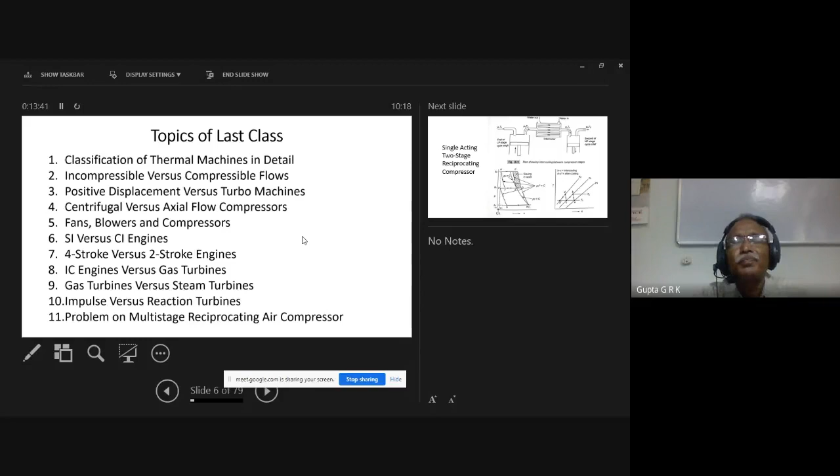And we have done a multi-stage compressor problem. This is a multi-staging one with a nice figure, so just recollect. Here, the bigger one is LPC, low pressure compressor. The smaller one is HPC, high pressure compressor. Air comes with suction conditions P1 and T1 into the cylinder.

So this suction goes from here to here, right? And here, both valves are closed and it gets compressed to B. At that point, if it goes further, the valve gets opened and it is pushed out of the cylinder - that is delivery. So B to G, there will be delivery.

After that, whatever is in the clearance volume gets expanded, and the cycle repeats. Its pressure is increased to intermediate pressure Px, and it is compressed to temperature Tx. Temperature goes up, and this increase in temperature reduces efficiency and increases the work needed, so I want to cool it using what is called an intercooler.

In the intercooler, it is constant pressure intercooling. So it comes from B to C like this. It is constant pressure intercooling. Here in the TS diagram, these are two pressure lines: this is P1 pressure, this is Px pressure, this is P2 pressure, all constant pressure lines.

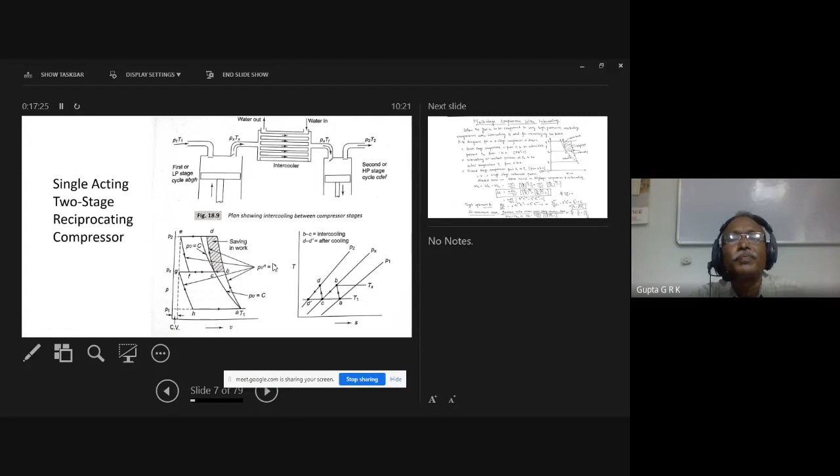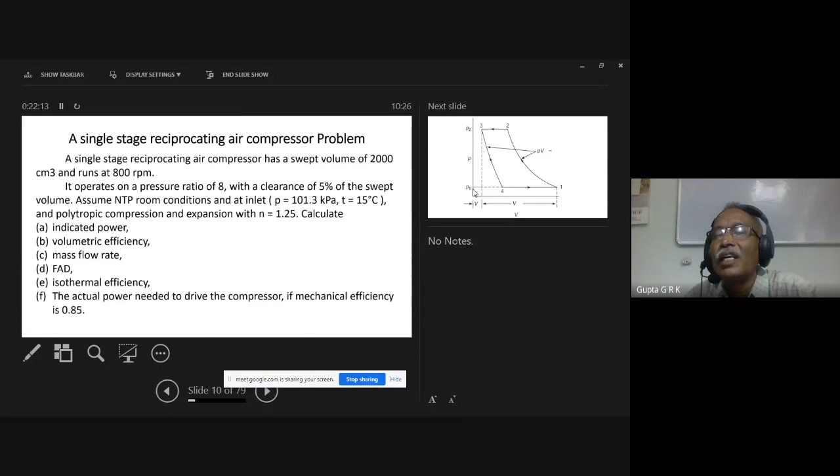The suction volume is V1 minus V4, from the suction which starts from 4 to 1. So the total cylinder volume is clearance volume plus stroke volume. You have to remember this terminology.

The stroke volume is given as 2000 centimeter cube. Clearance volume is given as 5% of the stroke volume, so 0.05 Vs, that is 100 centimeter cube. So the total cylinder volume is Vc plus Vs, which is 2100 centimeter cube.

Next, I want to find out what is the suction volume. For this I want to find out what is V4. This is because PV to the power n equals constant, so P3 by P4 and V3 by V4 are related. I can find P3 V3 to the power n equals P4 V4 to the power n, so V4 can be found as P3 by P4 to the power of 1 by n.

I know V3, which is clearance volume, and P3 by P4 is 8, and 1 by n is 1 by 1.25. I can find out what is V4. So the suction volume V1 minus V4 is 2100, the cylinder volume, minus 528, which gives 1572 centimeter cube.

Now we know that for a cylinder with clearance volume, the work is n by n minus 1, P1 into V1 minus V4 into P2 by P1 to the power of n minus 1 by n, minus 1. And n by n minus 1 is 0.25, 1.25 by 0.25, and T1, this is...

You have to put it in kilopascals, or he has put it in pascals. If it is put in pascals, I will get it in joules. If I put it in kilopascals, I will get kilojoules. So 101.3 into 10 cube, these are total pascals, into V1 minus V4, which is 1572 calculated here, in meter cube into 10 power minus 6.

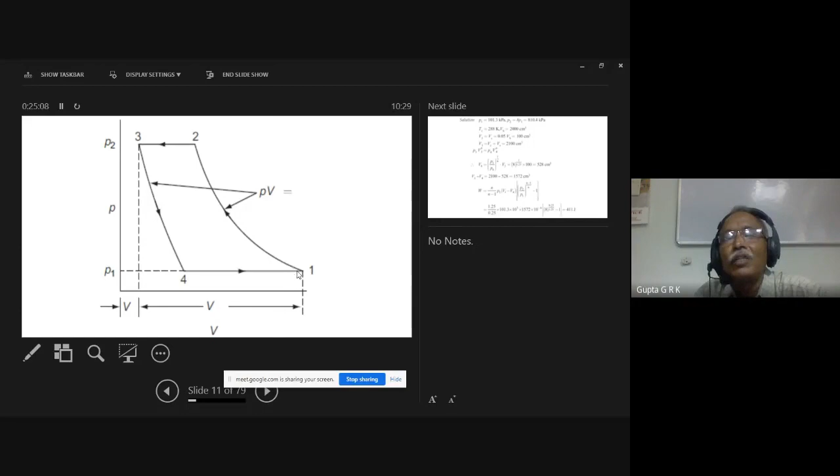And volumetric efficiency is V1 minus V4 by Vs, that is this volume by the stroke volume, because I have to get theoretically the stroke volume of air, but I am getting only the suction volume of air. So suction volume by stroke volume, that is 1572 by 2000 into 100.

This is volumetric efficiency. And mass of air compressed per cycle: so per cycle, this much volume is compressed. M is equal to PV by RT. P is anyhow this, and V is V1 minus V4, whatever air is compressed, and by 287 and 288, that is RT. So I will get this much mass flow of air.

This is per cycle, but again, 800 revolutions are there per minute, so into 800 gives 1.54 kgs per minute. And if you are asked per second, again divide by 60.

So it depends on how it is asked. This is mass compressed per cycle, this is per minute, and this is free air delivery. So V1 minus V4 is the free air delivered, which gives 1.26 meter cube per minute. This is mass and this is volume, right? So free air delivery is volume.

Now for isothermal efficiency, I have to find out isothermal power: P1 into V1 minus V4 log P2 by P1. We calculated P1 and V1 minus V4, and P2 by P1 log 8, giving 331 joules. This is for isothermal.

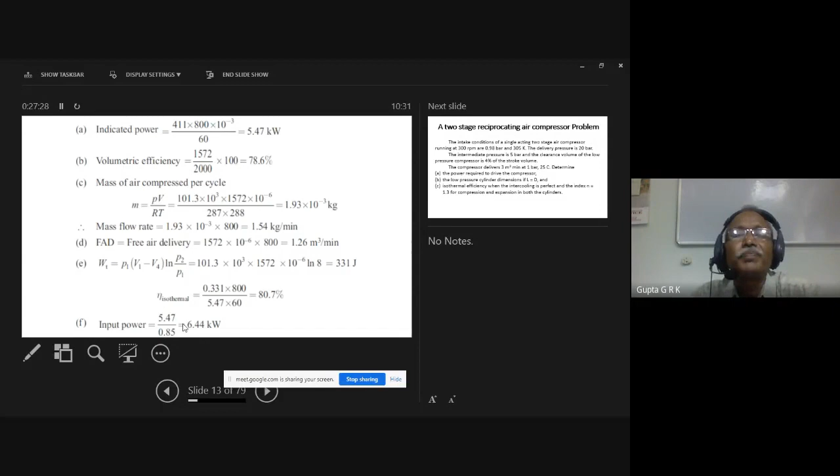This was a single stage; for two stage we already did one problem, but we will see one more problem here, where the intake conditions and NTP conditions are different.

The intake conditions of a single acting two-stage air compressor running at 300 RPM are 0.98 bar and 305 Kelvin - these are P1 and T1. The delivery pressure is 20 bar, and the intermediate pressure is given as 5 bar.

If the intermediate pressure is not given, I have to take the geometric mean of the two pressures, root of 20 into 0.98. But here he has designed for an intermediate pressure of 5 bar.

The clearance volume of the low pressure compressor, LPC, is 4% of the stroke volume. The compressor delivers 3 meter cube per minute at 1 bar and 25 degrees centigrade - this is the NTP condition he is taking. We need to determine the power required to drive the compressor, the low pressure cylinder dimensions, and the isothermal efficiency.

Okay, this is the indicator diagram, showing 0.98 bar, 5 bar, and 20 bar. So like the same thing here.

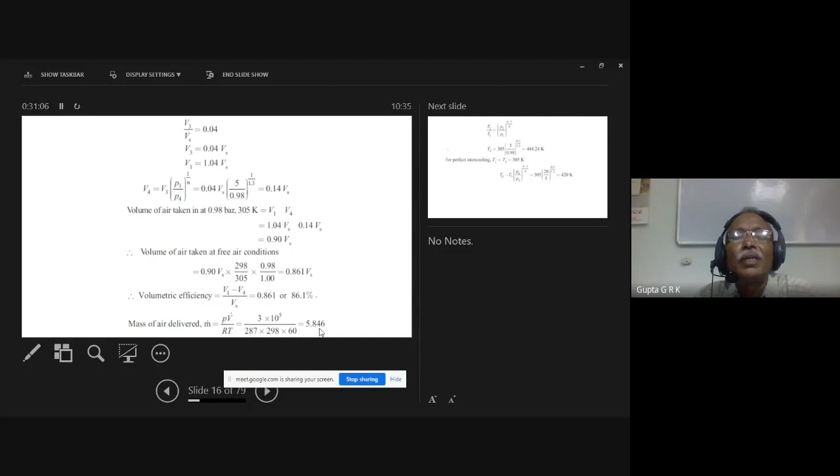The mass of air delivered is given as 3 meter cube per minute here, as the compressor delivers 3 meter cube per minute at 1 bar and 25 degrees centigrade, so that we put here. The pressure is only 1 bar, so 3 into 10 power 5 by RT, and taking it per second, we get the mass of air delivered in kg per second.

And if I want to find out what is the intercooling, also what is asked - we have to find out the low pressure cylinder dimensions.

T2 by T1 is equal to P2 by P1 to the power of n minus 1 by n. I can find out what is T2. And if I have perfect intercooling, T1 equal to T5, and T6 equal to, in the same way here, this is 6.

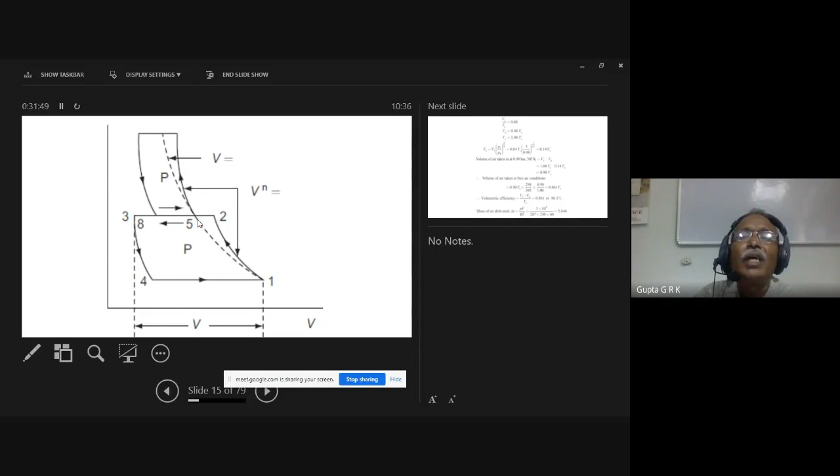So T2 by T1 I can find out from the P2 by P1 relation. And T6 by T5 I can find out by delivery pressure by intermediate pressure to the power of n minus 1 by n. So like that, I can find out what are the temperatures. T6 and T2 are found out.

And then the power required to drive the compressor, that is n by n minus 1, MR. Here, instead of writing in terms of pressure ratios, we are writing T2 minus T1 and T6 minus T5. We got in that way only, right? RT2 minus RT1, we have written P2V2 minus P1V1 and taken the common and all. So we can do this way, or you can use the pressure ratios, right?

So T2 minus T1 and T6 minus T5, I can find out what is the amount of power required. And mass of air delivered per stroke. This is because RPM is given 300 RPM and per second per stroke by 60, I can get this. And volume of free air per stroke.

Again, this PV by RT you can use, and you can find out what is the meter cube. And stroke volume pi by 4 d square L, if L and D are the length and diameter of the cylinder. So this is equated to

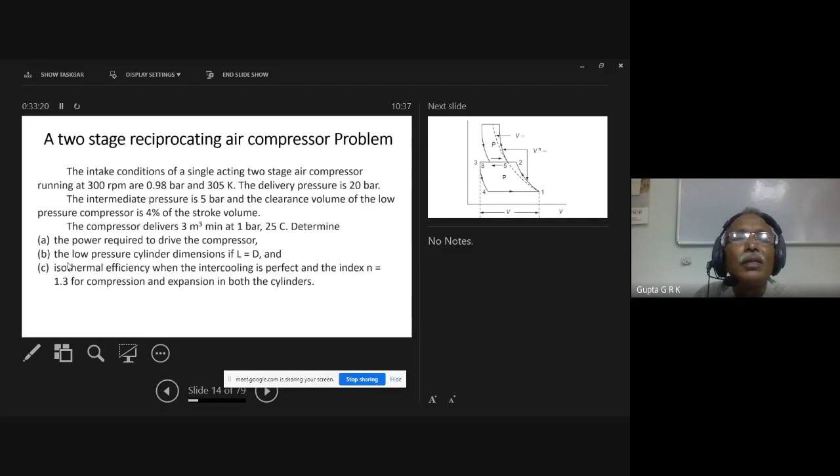then I can find out, because D in the problem it is given D is equal to L. You have to find out the low pressure cylinder dimensions if L equal to D. So I can get D square L as D cube, right? Or you can write L cube. And so cube root of this, you will get this. So in this way, I can get the dimensions of LP cylinder.

And isothermal power required, again, MRT1 into log P2 by P1. I know all the values, I can find out, and I can get the isothermal efficiency. That is isothermal power by actual power, 18.484 here. In that way, I can find out the isothermal efficiency.

Okay, this is the way we can find out or solve the problems of reciprocating compressors. And as I told, you can go through mainly this 18th chapter of PK Nag. And actually, these two problems also are taken from PK Nag. And there are further problems which you can go through.

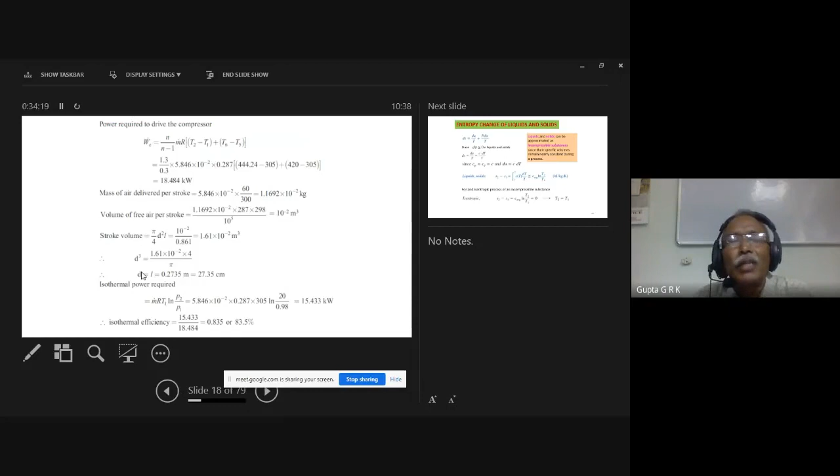There are small things which I have to cover. When we have taken the entropy change relations in terms of temperature ratio, pressure ratio, and volume ratio, if I have gases, I use that. But if I have liquids or solids, liquids and solids are incompressible, so dV equal to 0. dS is equal to du plus pdv by T, so dS is du by T plus pdv by T. So this will be 0. So this is Cv dT by T.

And if I integrate that, I will get Cv log T2 by T1. Another thing for liquids and solids is there will not be separate Cp and Cv. There is only one specific heat. So we use some average specific heat, and S2 minus S1 is C log T2 by T1. This is the one we use.

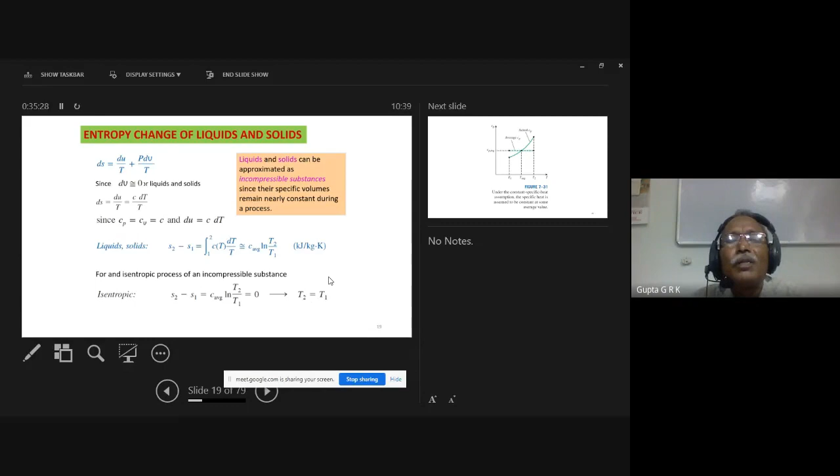Let's see, if I have isentropic process means S2 minus S1 is 0, and this is 0. This is 0 means T2 equal to T1. So for solids and liquids, isothermal process and isentropic process are same. There is no difference. This is one important observation you can make.

And another thing we have discussed about the isentropic efficiencies of steady flow devices like nozzles or steam turbines or gas turbines or centrifugal compressors, axial flow compressors. These are all steady flow devices. And one thing, because these are turbo machines, these turbo machines are very high speed machines. When the speeds are very high, there will not be any time for heat transfer.

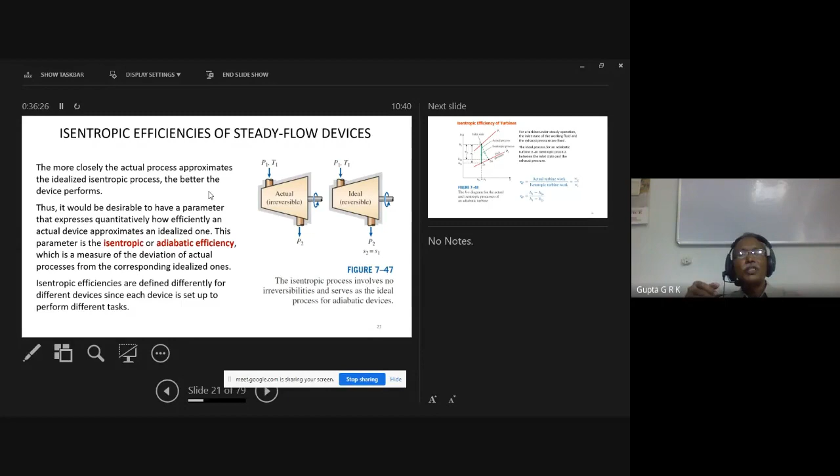So the actual process is adiabatic. And if I want the process to be ideal, it is isentropic. So isentropic process is the ideal process. And in reciprocating compressors, because they are very slow, the ideal process there is isothermal process. That's why the efficiency there, we call them as isothermal efficiency. In turbo machines, we use what is called as isentropic efficiency or adiabatic efficiency. This is one of the important things you have to know.

And as I told, there can be expansion or compression. In the turbines, there will be expansion. So if it is ideal, it is isentropic expansion. This is high pressure and this is low pressure. So there is expansion, isentropic expansion from high pressure to low pressure. Isentropic means vertical line on a TS diagram or HS diagram, right?

Because H and T are same for compressible flows. If it is isentropic, it comes straight, and because of the irreversibilities, there will be an increase in entropy, and it goes like this. So this is the actual process, this is the ideal process. The difference in enthalpy is the work, so this is the actual work and this is the ideal work. Ideal work is more, actual work is less from the turbine, so I get less work because of the losses.

So actual turbine work by isentropic turbine work, WA by WS, is nothing but H1 minus H2A by H1 minus H2S, for turbines. Here 2A is actual, 2S is isentropic. You will get a similar one for nozzle also, but there it is not work, it is kinetic energy. In turbines, enthalpy is converted to work; in a nozzle, enthalpy is converted to kinetic energy. So that is the difference.

So similar thing, there is nothing, and that is some practical example. If I have 3 megapascal and 50 kilopascal, it is expanded, so it is coming like this. This is the way I get the efficiency.

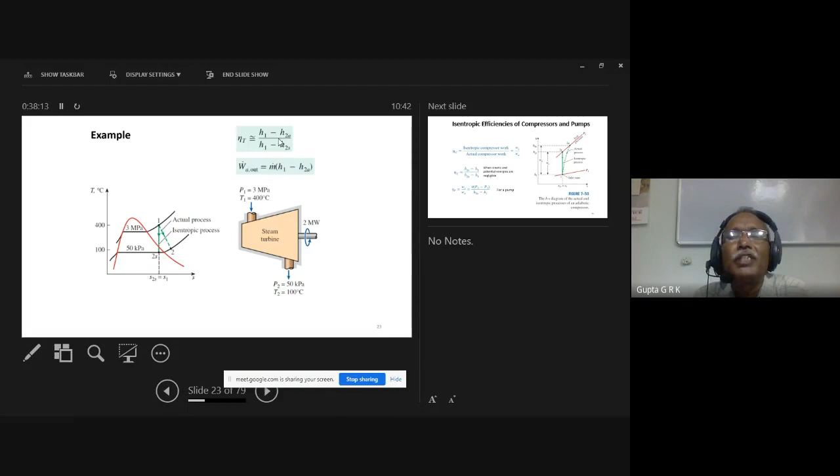And for the compressors and pumps, it goes up because it is compressed. From low pressure to high pressure, this is ideal isentropic, and this is actual. The ideal work is this, and the actual work is this, which is more. So the actual work that I have to supply to run the compressor or a pump is more than the ideal work. So we define compressor efficiency as isentropic work by actual work. Isentropic is H2S minus H1, and actual is H2A minus H1.

And for a pump, H is written in terms of VdP, V into P2 minus P1, by H2A minus H1. This is for compressor, and here, can't we use isothermal efficiency in turbine? Sometimes it may be used, depending on whether you are providing cooling or not. There is a possibility of providing cooling continuously by circulating water over this. Though the time is less for the flow to be here during the fast processes, still there can be heat transfer.

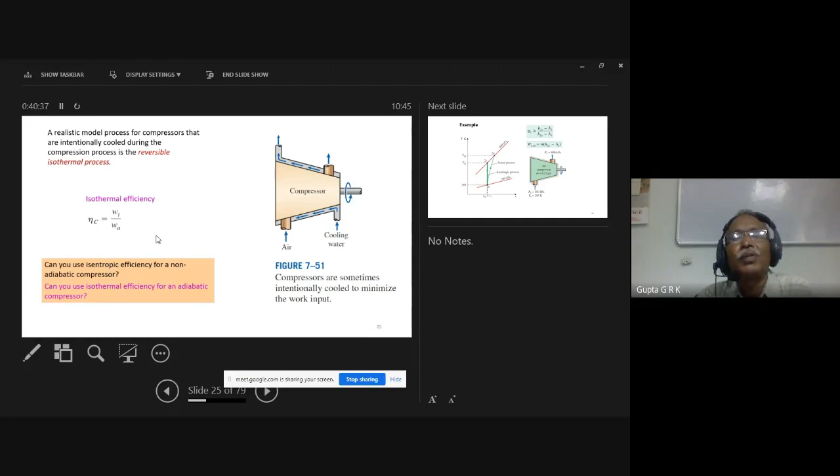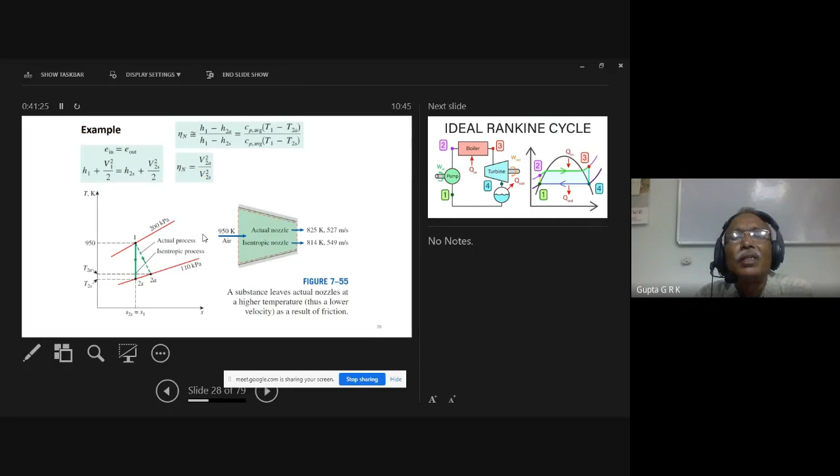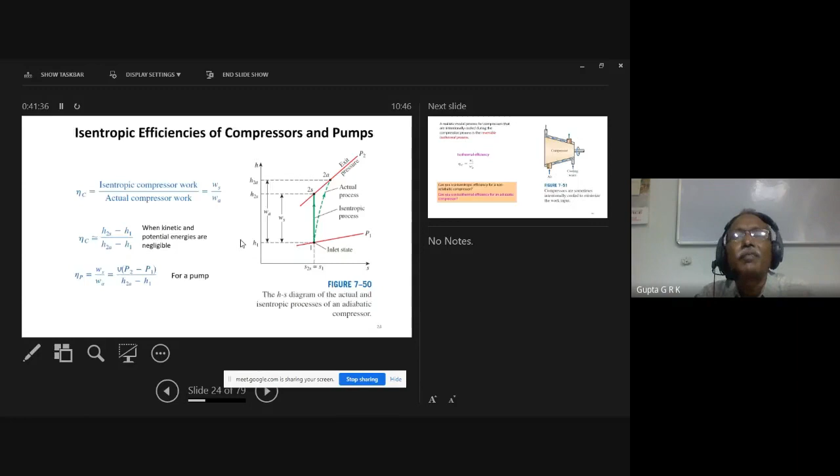This is about isentropic efficiency of compressors, turbines, nozzles, diffusers and all, which we have discussed already. Now we try to see how a Rankine cycle works, which you have already studied in your BME. It is just a recollection of that, and we will see how to solve a Rankine cycle problem, because here we use the steam tables.

First, if you take state 1, it enters the pump. In the pump it is compressed isentropically, these are turbo machines. This pump and turbine are turbo machines, so they are high-speed machines, and the ideal compression is isentropic compression. It is isentropically compressed to high pressure. This is a constant pressure line, low pressure line, and this is a constant pressure line, high pressure line. From low pressure to high pressure, it is compressed in the pump.

So 1 to 2, this is the compression, and here, constant pressure heat addition. In all these steady flow machines, like steam turbine, gas turbine and all, heat transfers take place isobarically. Heat addition and heat rejection, both processes will be isobaric. And compression and expansion are isentropic because these are high-speed machines. So there will be 2 isentropic processes, in compression and expansion, and 2 isobaric processes, heat addition and heat rejection. Compression and expansion are isentropic, heat addition and heat rejection are isobaric, constant pressure.

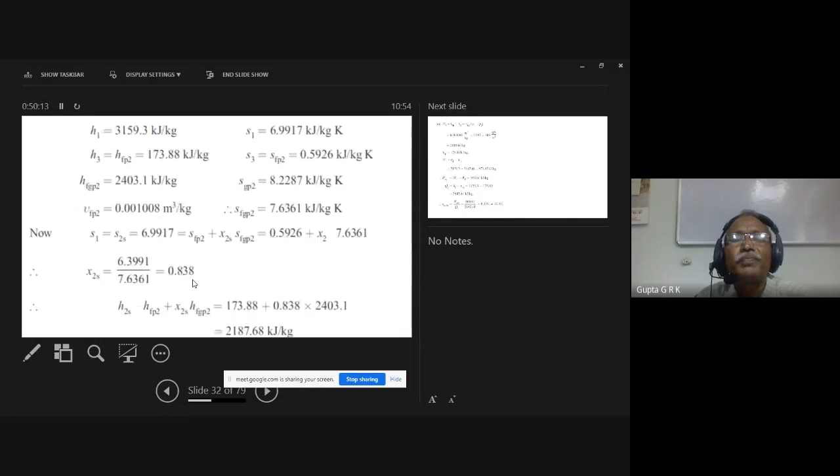So X2S is equal to S2 minus SF by SFG, I will get this. And once I get X2, I can find out H2 because I know HF and HG at 0.08 bar. I can find out what is H2. So H2 is found out.

So H1 is known, H2 is known, H3 is known. I want H4. How to get H4? I don't know where it is. So W pump is H4 minus H3.

And here in the pump, because it is liquid, I assume the specific volume is constant. So if specific volume is constant, integral VdP is V into P4 minus P3. I know P4, I know P3, I know specific volume here, VF. So VF at 0.08 bar into P4 minus P3 gives me W pump.

W pump is H4 minus H3. So because H3 is known, H4 can be obtained. In that way, I can find out H1, H2, H3, H4.

Once I know H1, H2, H3, H4: H1 minus H2 gives turbine work, H1 minus H4 gives QH, and H4 minus H3 gives pump work. So turbine work minus pump work gives the net work, and net work by the heat supplied, which is H1 minus H4, gives me the efficiency. So like that, I have to find out.

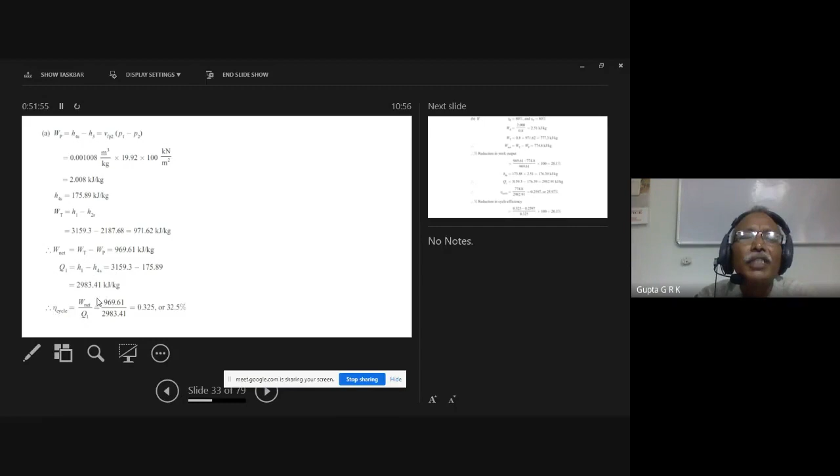So W pump is H4S minus H3, and in that way H4S is obtained. And W turbine is H1 minus H2S. All the ideal processes I am talking about. So W net is WT minus WP, and Q1 is H1 minus H4, and efficiency is equal to W net by QH. So in this way, I can find out the efficiency.

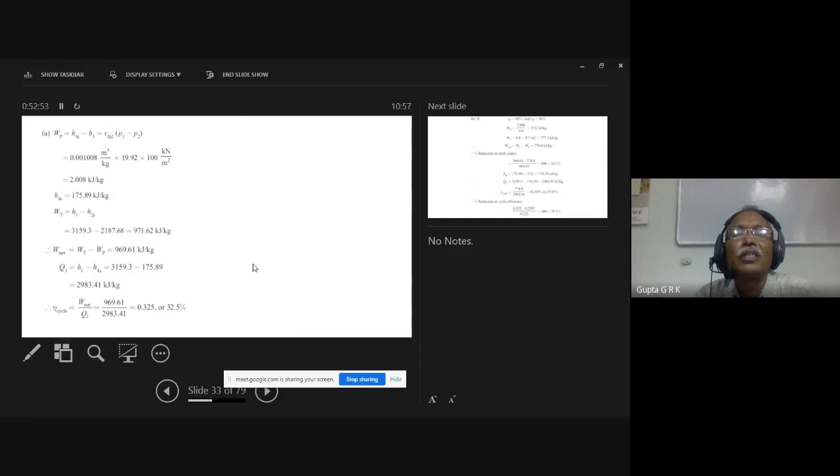So if eta P is 80%, eta T is 80%, WP is ideal work by 0.8, and the turbine work is ideal work into 0.8. And difference of these two will give me net work. The previous net work is 969 and present actual work is 774. I can find out what is the reduction in the work.

So in the same way, now H4S, because pump work is different. If I add, so here I want this work, I have to take the actual work. So you have to add H3 plus the actual work, I will get H4. Then I can find out the heat added.

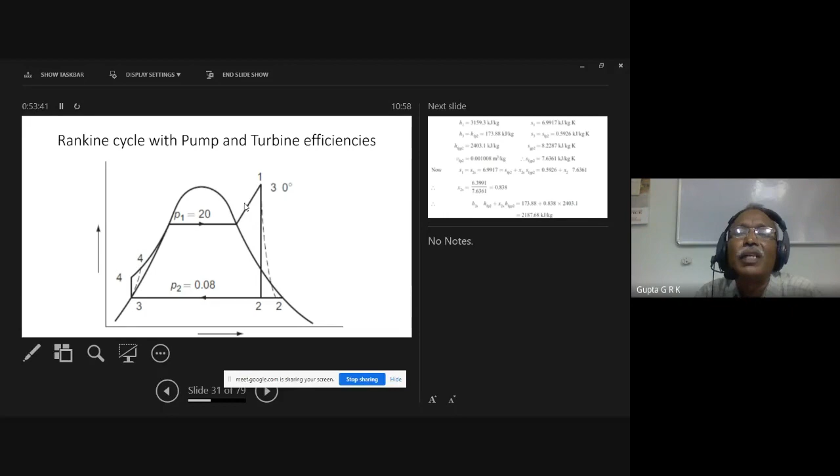So that is the way I got H4, and Q1 is equal to 3159.3 minus this, which gives me heat supplied. This is the output, and this is the heat input, so I can get the efficiency. The previous efficiency is 32.5%, and here it's 25.97%. I can find out the reduction in efficiency, and the percentage.

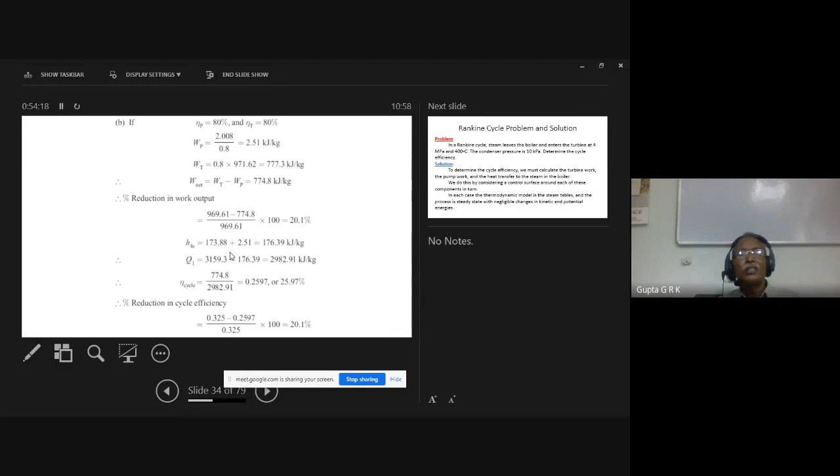This is how I solve a problem with an actual Rankine cycle and an ideal Rankine cycle, to find efficiency. Let me quickly repeat: I have to find enthalpies at each and every point, 1, 2, 3, 4. This can be obtained using the saturation tables at this pressure to find HF. Here you can find it from the superheated tables, because both pressure and temperature are given. Then, since entropy is also found, the same entropy will be here.

So I have to find out if it may be outside or inside. If it is outside, it will be in the superheated tables. If it is inside, it will be in the saturated tables. So I have to find the dryness fraction here. Using SF and SG, I find the dryness fraction, and using HF and HG, I can find what the enthalpy is here.

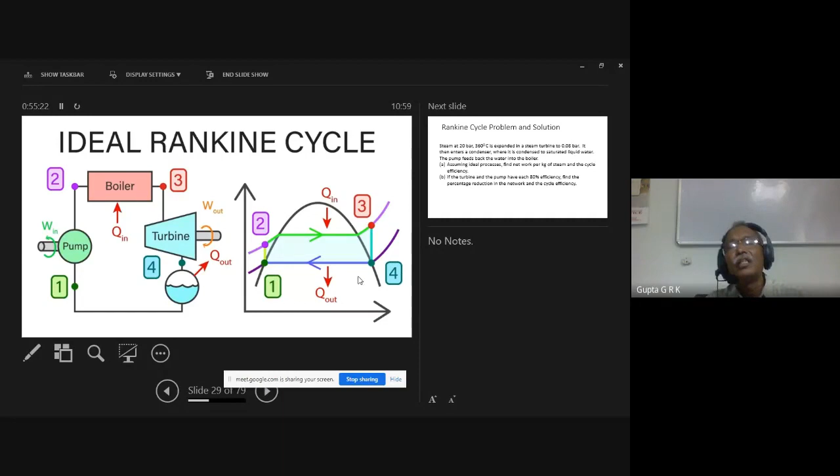For the pump work, I have to take V into P2 minus P1, which gives me pump work. To H1, I add pump work to get this value. In this way, I get all 4 enthalpies, and the difference in all 4 enthalpies gives me the heat transfers and work transfers, from which I get the efficiency. Is it okay? Any questions?

Okay, Shivam, thank you. No doubts? So you can now solve the Rankine cycle.

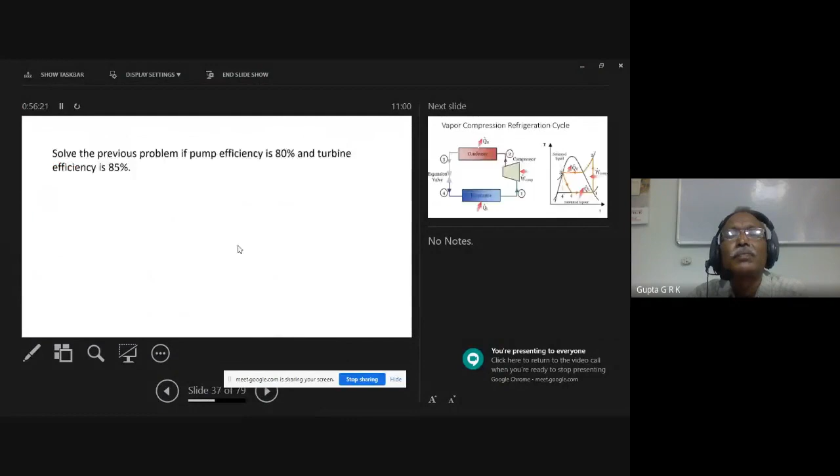Yeah, it is an interesting story, right? You'll like it. One professor has written this: some time ago, I received a call from a colleague who asked if I would be the referee on the grading of an examination question.

Okay, something happened in a university, in a science college. It seemed he was about to give a student a 0 for his answer to a physics question, while the student claimed he should receive a perfect score, and would do so if the system were not set up against him. So the instructor wants to give 0 marks, and the student is asking for a perfect score, and there is a problem between them.

So they asked an arbiter, a referee, to go through the problem and solve it. The instructor and the student agreed to submit this to an impartial arbiter, and I was selected. Okay, the problem is...

I went to my colleague's office and read the examination question, which was: show how it is possible to determine the height of a tall building with the aid of a barometer. So using a barometer, how do you find the height of a tall building? Okay, will anybody answer this?

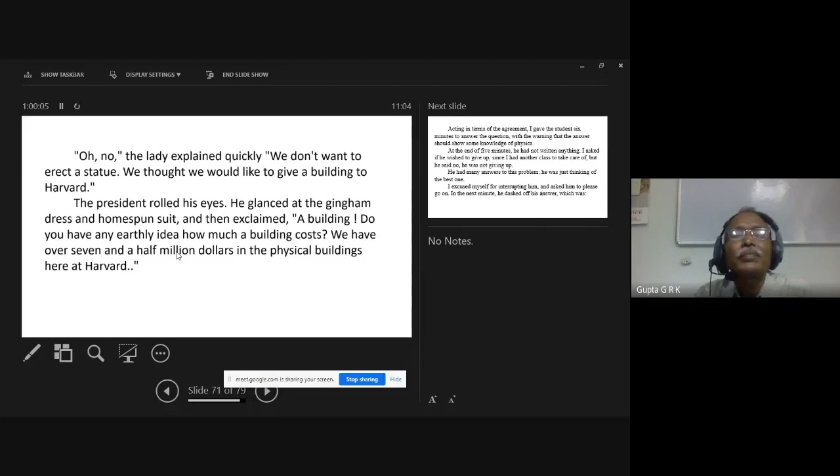Acting in terms of the agreement, I gave the student 6 minutes to answer the question, with the warning that the answer should show some knowledge of physics. So that is a condition. At the end of 5 minutes, he had not written anything.

I asked him if he wished to give up, since I had another class to take care of. But he said no, he was not giving up. He had many answers to this problem, he was just thinking of the best one. He said, I have many answers, I'm thinking which is the best one to answer.

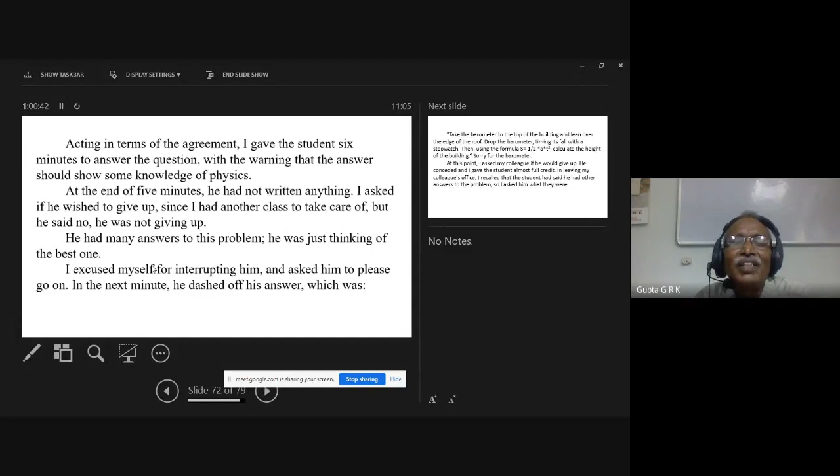I excused myself for interrupting him and asked him to please go on. In the next minute, he dashed off with the answer. He has given this answer: take the barometer to the top of the building and lean over the edge of the roof. Drop the barometer, timing its fall with a stopwatch. Then use the formula S equals half AT square, calculate the height of the building. And sorry for the barometer.

So the barometer is gone, right? That's the answer he gave, but there is physics in it. At this point I asked my colleague if he would give up, because still he didn't get the answer he is expecting, but he cannot say it is a wrong answer. So he conceded, and I gave the student almost full credit.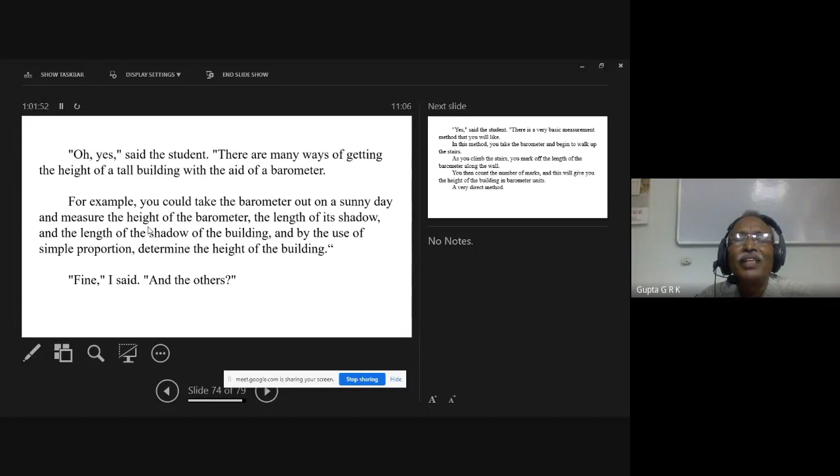In leaving my colleague's office, I recalled that the student had said he had other answers to the problem, so I asked him what they were. Oh yes, said the student, there are many ways of getting the height of a tall building with the aid of a barometer. For example, you could take the barometer out on a sunny day and measure the height of the barometer, the length of its shadow, and the length of the shadow of the building, and by the use of simple proportions, that is similar triangles, determine the height of the building. Okay, fine, I said, this is also okay.

And another one, yes, said the student, this is a very basic measurement method that you will like. In this method, you take the barometer and begin to walk up the stairs. As you climb the stairs, you mark off the lengths of the barometer along the wall. You then count the number of marks, and this will give you the height of the building in barometer units, how many barometer heights.

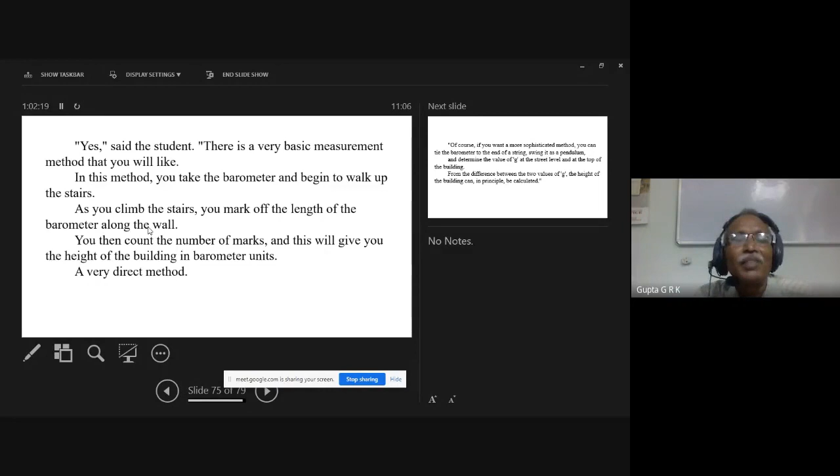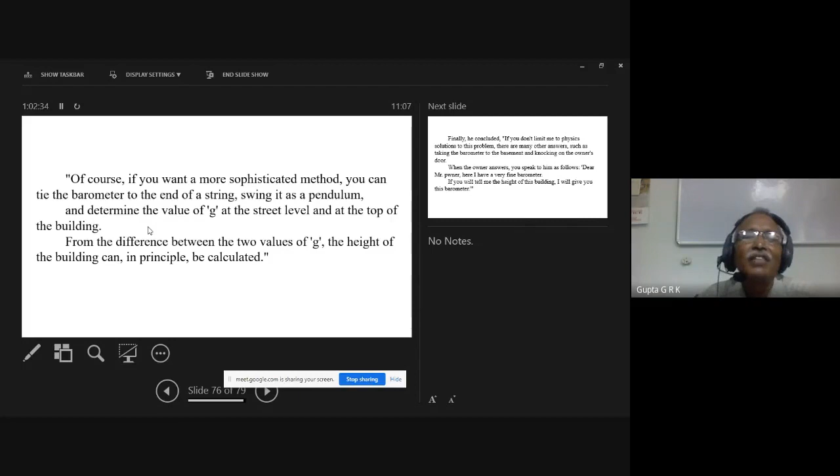And it's a direct method, he said. Of course, if you want a more sophisticated method, you can tie the barometer to the end of a string, swing it like a pendulum, and determine the value of G at street level and at the top of the building. And from the difference between the two values of G, the height of the building can be in principle calculated.

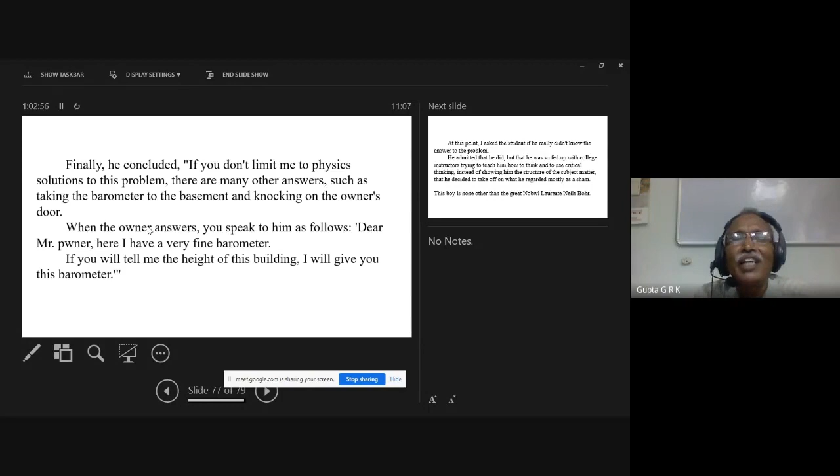Finally he concluded, if you don't limit me to physics solutions to this problem, there are many other answers, such as taking the barometer to the basement and knocking on the owner's door. When the owner answers, you speak to him as follows: Dear Mr. Owner, here I have a very fine barometer. If you will tell me the height of this building, I will give you this barometer. That is the way.

At this point, I asked the student if he really didn't know the answer to the problem, because he didn't give the answer expected. Then he admitted that he did know it, but that he was so fed up with college instructors trying to teach him how to think and use critical thinking, instead of showing him the structure of the subject matter, that he decided to take off on what he regarded mostly as a sham. And this boy, this great boy, is none other than the great Nobel laureate Niels Bohr.

That's why I wanted to tell this particular story on this day. It is his birthday. Thank you very much.